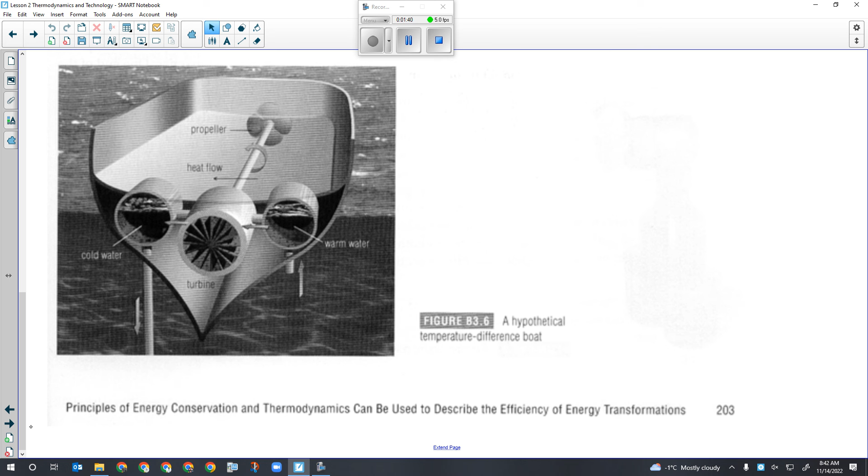Then we got into this whole thing about the second law of thermodynamics, energy going from hot to cold. We talked about the weird design for that boat with the long pipe that went down into the water—the idea being that the warm water at the surface would run through the engine, through the turbine, and down into the cold water through the really long pipe. We said this was completely unrealistic because those waters are already in contact with each other, and there wouldn't be a huge temperature differential.

But the idea is sound, and we talked about using the second law of thermodynamics with this little hot water heater that could heat water in a hot tub. The cold water would come in through this pipe, go into the water heater and be heated up, come out through the pipe at the top and go into the tub, creating a current, or a convection current, where that energy would be exchanged. It would keep going through because of the second law—the second law is going to keep that water flowing through that heater until everything is the same temperature, and then it'll stop.

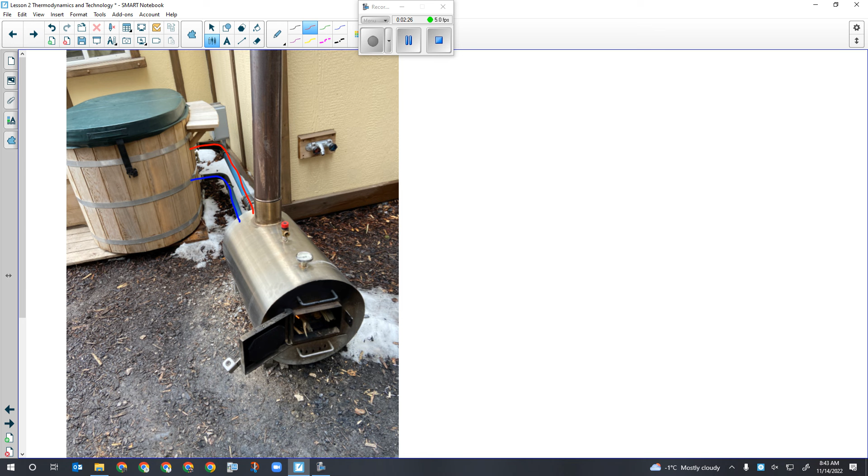If it goes faster, the greater the difference in temperature. So that is the principle behind heat engines. Heat engines use the second law of thermodynamics. If there is a really hot area and a really cold area, energy will want to flow from hot to cold. When it does so, it usually will take matter with it. That movement of matter can then be used to turn a turbine or something else to generate power.

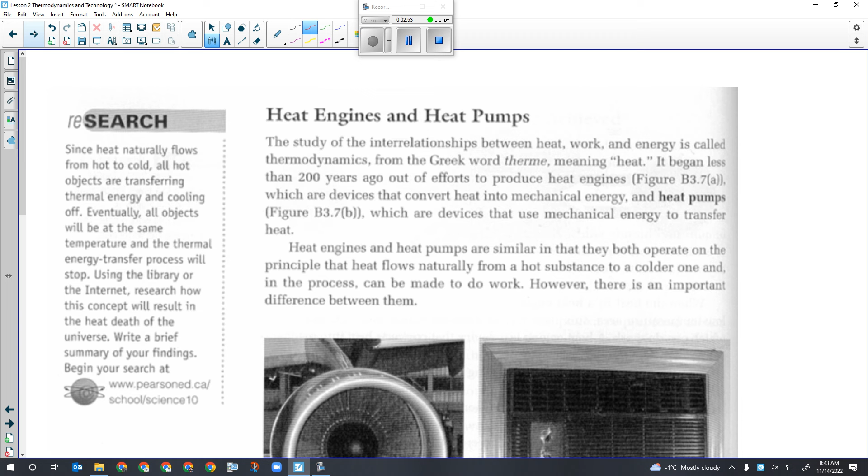That's the principle behind a heat engine, and that is exactly how a jet engine works. In a jet engine, you've got the area of combustion near the front of the engine. Air goes through the engine, transferring that heat out to the back, and that spins the turbine that creates the thrust from the jet engine. The greater that temperature difference, the faster the turbine will spin, and the more thrust will be produced. If there's an afterburner, there's a second, basically hot spot, that is continuing that and creating even more thrust. Does that make sense?

A heat pump works the opposite way. A heat engine uses the second law of thermodynamics; a heat pump goes against the second law of thermodynamics. So if the jet engine is diffusion, the natural flow from high to low, a heat pump is active transport—it uses energy to actually pump hot air or hot water from the hot area to the cold area. Since you're going against the direction it wants to flow, you have to put energy into it.

This is how an air conditioner and a refrigerator work—they're both heat pumps. They take the air from inside your house... I said that backwards, didn't I? From the cold to the hot is the way. With an air conditioner, it takes the air in your house, which is not as hot as the air outside, and runs it through the air conditioner, which contains a compressor and a condenser, and it cools it. Then it pumps the heat using a fan to the outside air, which is already hotter. It uses a lot of energy—your fridge and your air conditioner are the two largest consumers of electricity in your home.

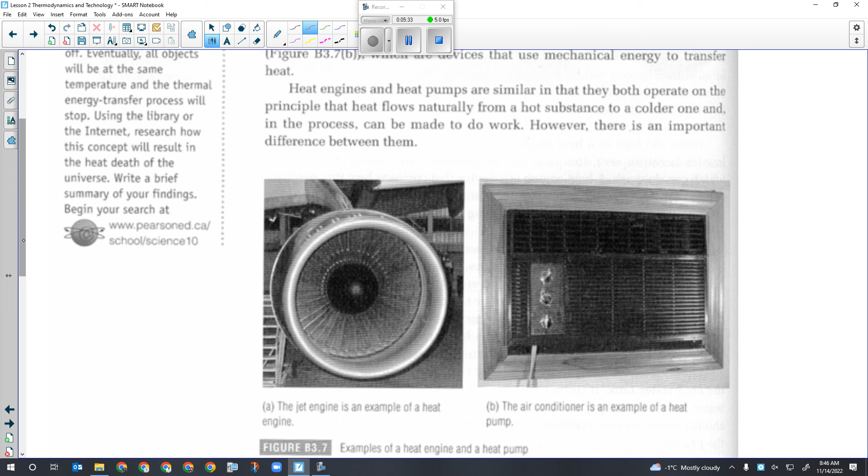So you've got these coils, and they're going to take that coolant down to the compressor. The hot coolant runs from the coils to the compressor. And what do you suppose the compressor does to it?

Kind of like its name would imply. What does a compressor do? Compresses things, exactly. And when you put a gas under pressure, or you compress a gas, you can turn it back into a liquid.

When you do that, it releases all of the energy it absorbed to become a gas. So when that energy is released, because it's changed back into a liquid, it is blown out the bottom of the fridge by the fan.

You may have noticed that there's usually warm air coming out from under the bottom of your fridge when it's running. That warm air, that heat, is coming from the food inside the fridge. It's pumping it out into the hotter area, because obviously it's hotter in your house than it is inside the fridge. So it's taking heat from a colder area and pumping it out into the hotter area. Does that sort of make sense to everybody?

So can you air condition your house with your fridge door open? Why not? You're right, you can't. Why not? Homer Simpson tried it once.

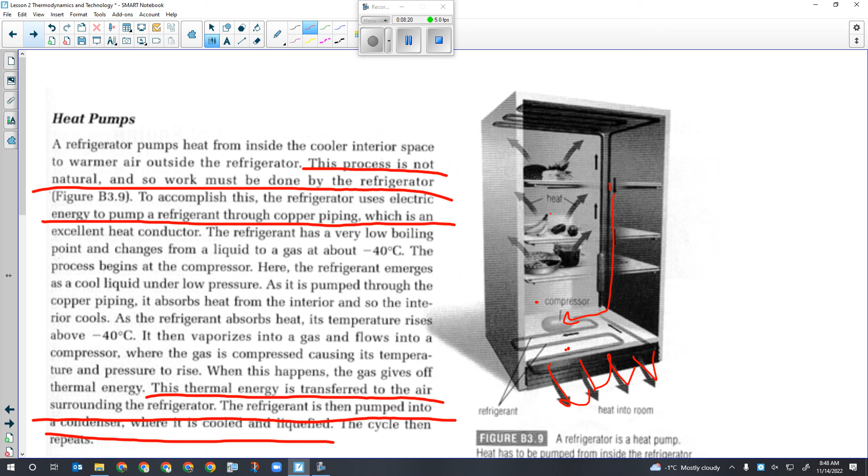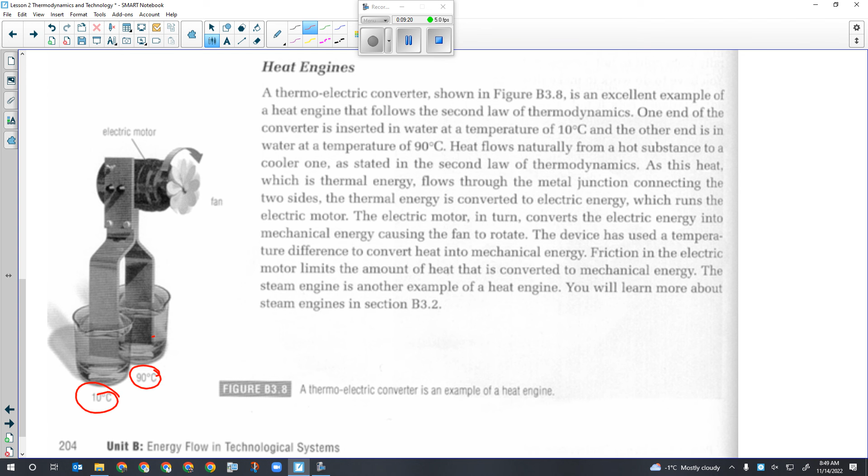What happens to the speed of that fan as they get closer and closer to each other's temperature? It slows down. It slows down, yeah. The greater the difference, the faster the rate of transfer. So if there's not much of a difference, then you don't get that fan spinning very quickly. Thank you, I appreciate that contribution. Does that sort of make sense? Yeah.

So, for a heat pump, remember that the process is not natural. Energy wants to flow from hot to cold, but a heat pump is making it go the other way. That requires energy, so we put a lot of energy into that in order to make it happen.

Thermal energy is then transferred to the air surrounding the refrigerator, the hotter surroundings, and the refrigerant is pumped back to the condenser, or the compressor, cooled and liquefied, and then recycled.

So the compressor is the loud thing you can hear running when your refrigerator is running. It doesn't run all the time unless you've left the fridge door open. But when you close the fridge door, the light goes off—there's no way to check that, but it goes off—and the compressor won't run as much. All right, everybody good with those ideas?

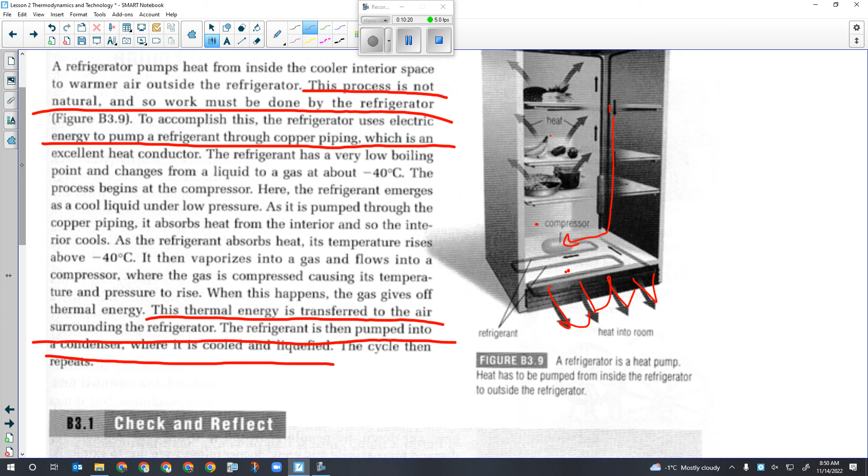Okay, let's have a look at these ones here. So, question number 2.

First law of thermodynamics says that energy cannot be created, it cannot be destroyed, it can be transferred, it can be converted. When work is done to a system, it gains mechanical energy. When work is done by a system, it loses mechanical energy. If heat is transferred to a system, it gains thermal energy. If heat is transferred away from a system, it loses thermal energy. That's the very extended version of the first law of thermodynamics.

What is the distinction between work and heat? First thing, work and heat are both transfers of energy, so they have that in common. It's the type of energy they transfer that is different. Work transfers mechanical energy, where heat transfers thermal energy. That's the distinction between them—the type of energy they transfer is different. Work is mechanical, heat is thermal.

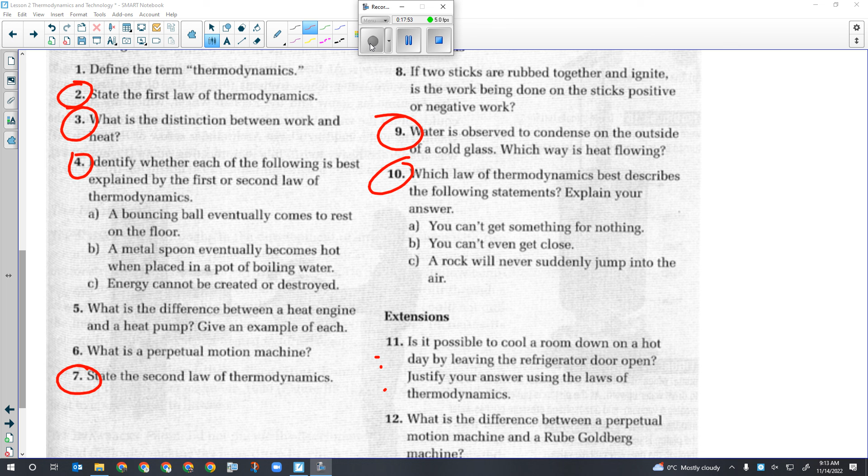Okay, now this, I can't remember if I actually put this in your notes package or not, but it's just something we're going to talk about because it's kind of applications of thermodynamics.

The design of machines, engines, and tools took kind of a weird path. We started building machines and tools before we really understood the science behind them. We needed technology to do a job. That's what technology is, applied science. It's science applied to do a job. But sometimes our technology gets ahead of our understanding.

And the building of engines is kind of a prime example of that. We didn't always understand exactly how the laws of thermodynamics applied to this stuff, but we did it because we could. So some of the earliest machines were things like the Archimedes screw. It was the first pump, great for moving water from low areas to high areas, because obviously water doesn't do that on its own. Water flows downhill according to the second law of thermodynamics.

So the Archimedes screw is basically, well, like any other screw. It's an inclined plane wrapped around an axis. So if I ever tell you that you're an inclined plane wrapped around an axis, it means you are screwed. Just so you know, that's Sheldon Cooper to it, I can't take credit for that. So it's an inclined plane, but it's wrapped around an axis.

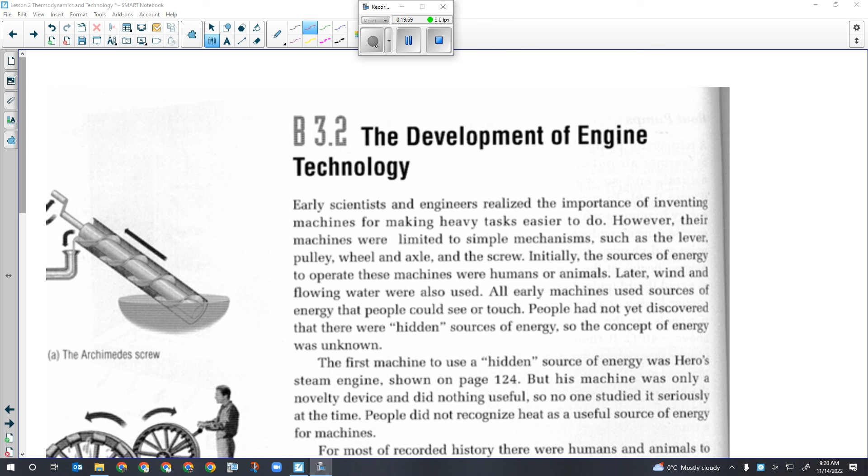There's also things like the Persian wheel, which you could take, you had one wheel that spun the other wheel, and this wheel had buckets on it. So you could raise the water out of there and drop it onto this, and then an aqueduct system would carry it somewhere else.

The Persians were big for building aqueducts and things like that. This was all powered by either people or livestock. We didn't really get into true engines until we started making them use fuel.

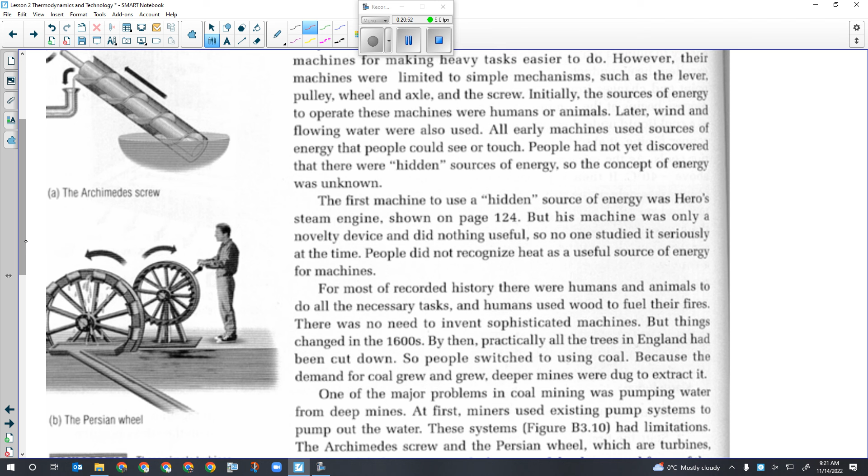The first engine powered by fuel was like Hero's steam engine, which used burned coal to evaporate water, turning it into steam. Steam could flow pressurized through something and turn something else, making it work, like moving a piston up and down. We started building these engines without really understanding how it all worked.

More modern pumps, like instead of the Persian wheel and the Archimedes screw, are reciprocating pumps. The screw and the wheel didn't do much, they just kind of turned. But a reciprocating pump actually pumps in both directions.

So there's a one-way valve system here. As you pull this piston back with the crank, it creates a suction. That suction will bring the top valve down and the bottom valve up, which will draw water into the pump chamber. When the piston starts going this way, the pressure closes this valve, pushes this other valve open, and shoots the water through that valve upwards. So it's actually doing work in both directions.

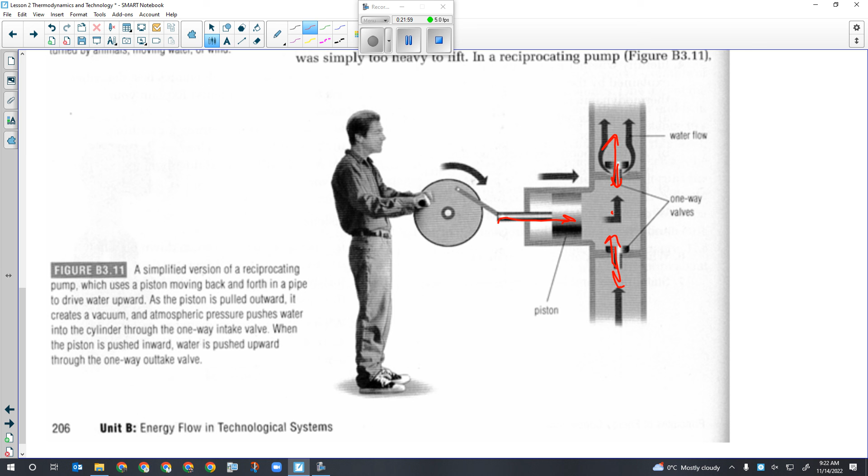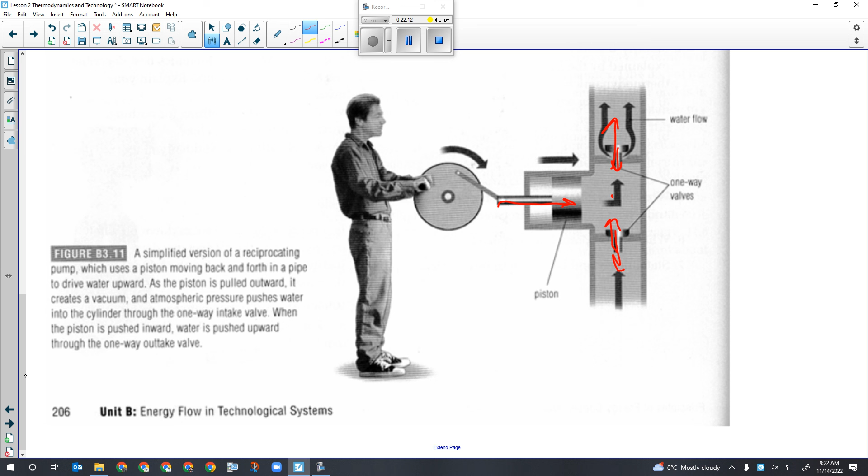Once that was figured out, then we could attach a motor to it to make it do that instead of having a person or a horse actually doing the cranking. Remember before we talked about these hidden sources in some of the fuels we used, that wood could make so much energy, but coal made more, and so on. Well, that's what engine technology kind of came from.

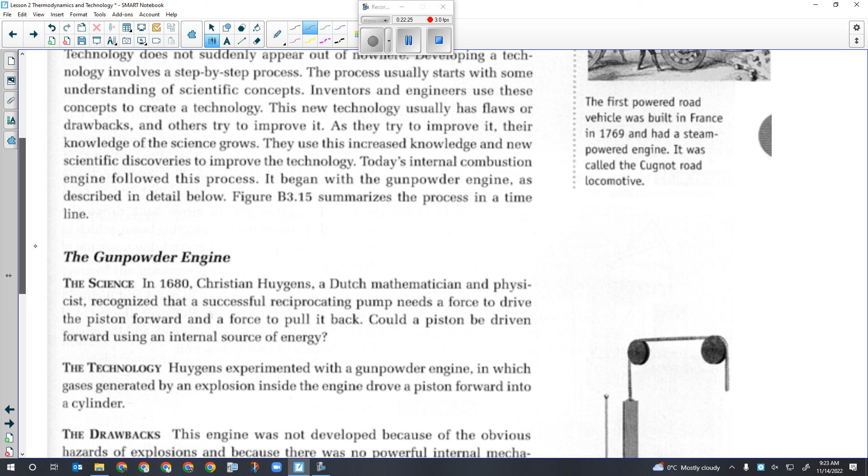The first engine was designed by Christian Huygens. That's also the guy the probe that landed on Titan was named after. He did some stuff with astronomy as well.

He was a Dutch mathematician, and he recognized that this reciprocating pump needed something that could power it, so it wasn't connected to a person or an animal. So he said, I'm going to build an engine that can use the pressure of an expanding gas to do work. He knew that's what steam could do. So he thought there's got to be a way to use expanding gases to push a piston that can be connected to this crank, which is basically how all engines today work.

So he designed the gunpowder engine. Now, as it would sound, it was pretty dangerous. So there was no actual prototype ever built or tested. But the idea is sound.

If you blow up gunpowder, it explodes, and an explosion is rapidly expanding gases. They can do work, also known as destruction. It's that pressure wave of the explosion that does all the damage. So he said, if I can contain that in a small space, then it can do work.

This is how a cannon works, right? If I detonate gunpowder and I have a ball there, the expanding gases push the ball up. Well, if I replace the ball with a piston, the piston can do work. The problem being, you're containing an explosion.

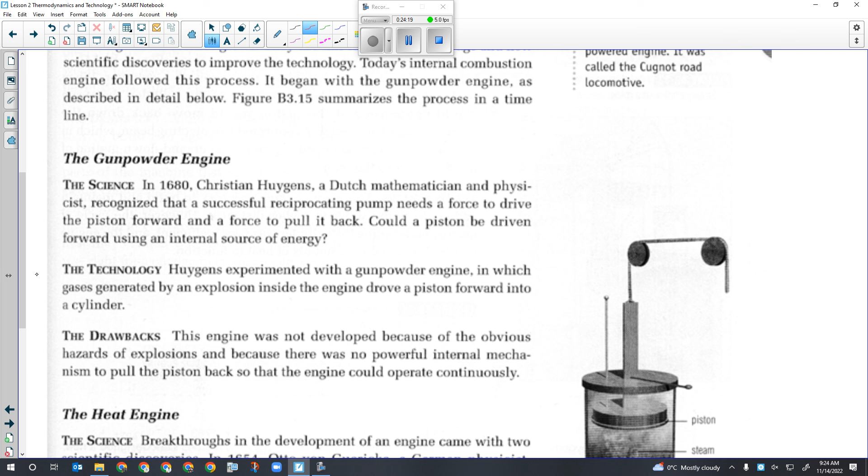What's the problem with containing an explosion? Explosions don't like to be contained. That's the problem with containing an explosion. You really have to control that explosion. Otherwise, it just explodes, and then it's bad. So the gunpowder engine was never actually built, but was sound in its design, at least.

One of the earliest steam engines looked something like this. Now, what we use today are called internal combustion engines because the explosion or combustion happens inside the motor itself, right next to the piston. This is an external combustion engine, where the steam, water and piston are in a separate chamber from the heat source.

This first engine was not efficient at all. They would start the fire, which would boil the water, and the water would turn into steam, and the steam would slowly lift the piston, which could then be attached to a crank or a cable to do useful work. Once you got the piston to the top of the chamber, you had to spray water all over this thing in order to do what?

Once the piston gets to the top, can you get anything else out of this? No, that's as far as the piston can go. You need the piston to come back down. So you spray water all over this, which puts out the fire, cools it down, the steam condenses back into water, and the piston goes back down. Then you light the whole thing back up again, and you get the piston to go back up.

Is this very efficient? Terrible. But it was early, the early designs of engines and things like that. The idea was sound, still worked. You could use steam and expanding gas that didn't blow up in your face to do work.

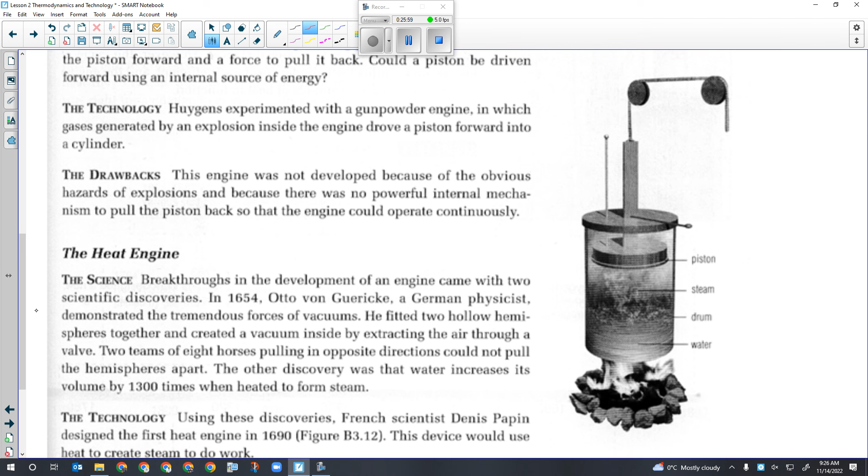So once people realized that, the design of steam engines kind of rapidly improved. There was a very quick development or evolution of the steam engine. But they all were external combustion.

You had essentially a boiler where the water was and the steam was produced, and then you had the heat source, usually a coal-fired furnace underneath it. So you get your steam in here. The steam would do its work, make things go, and then it could be brought back to the boiler after it condensed. So there could be some circulation, things like that. Or fresh water brought in, hot water out, whatever. You get the work done that way.

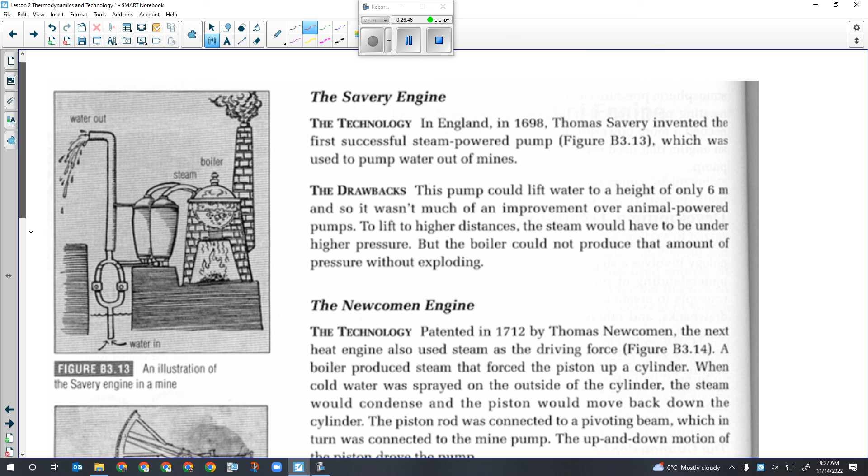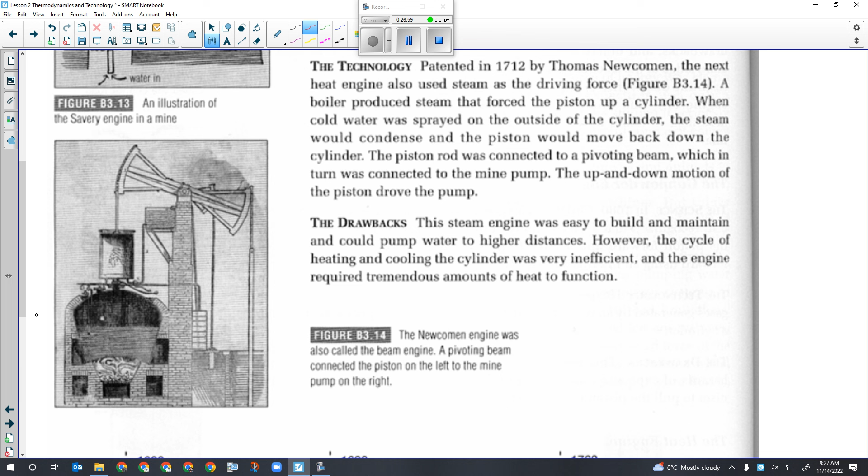With this one here, same idea, but getting more efficient. Instead of having the fire completely open, we had an enclosed furnace, things like that. So they got more and more efficient, used less and less fuel, and were able to reciprocate much more.

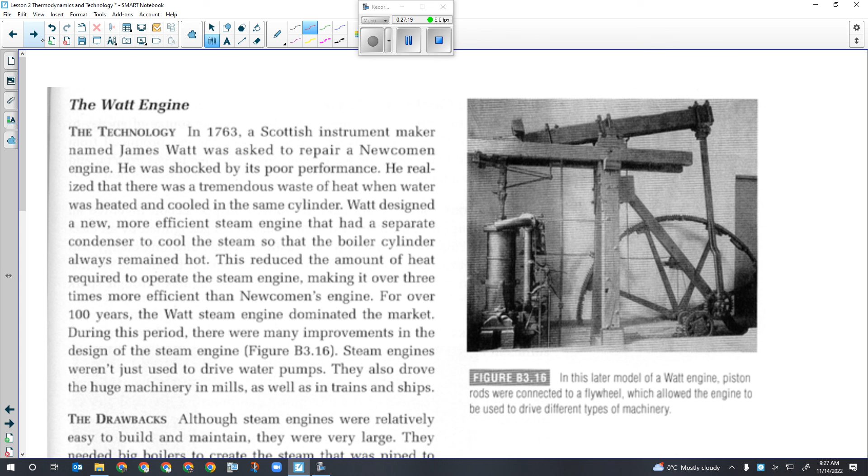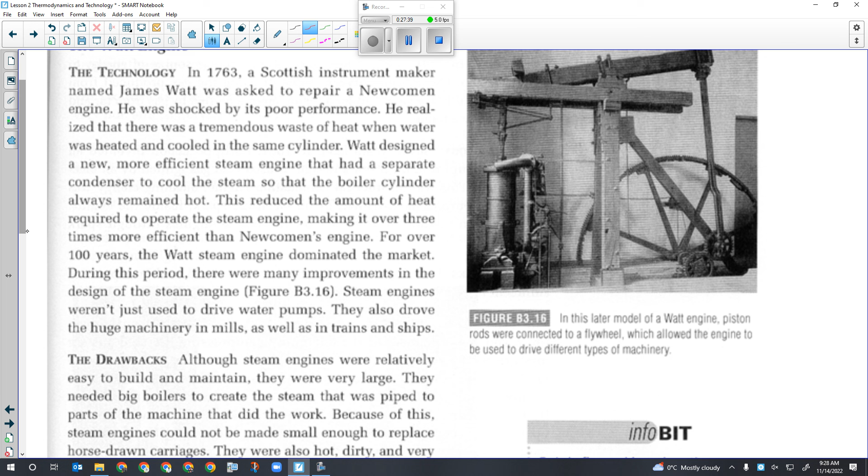Watt is the one who probably developed the best, one of the best steam engines. He was actually asked to repair an older model and couldn't believe how bad it was, how poorly it performed. He realized there was a tremendous waste of heat when the water was heated and cooled in the same cylinder. So Watt designed a new, more efficient steam engine that had a separate condenser to condense the steam, so that the boiler cylinder always remained hot, which makes good sense, right? Why would you cool your main boiler every time you needed to move the piston? So that reduced the amount of heat required to operate it, made it 3 times more efficient, and Watt's steam engine was used for a very, very long time.

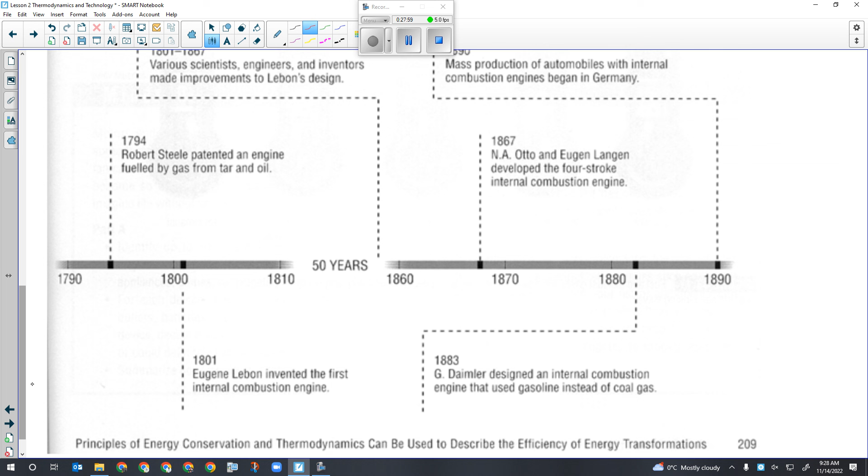So this is kind of what our timeline looked like. In less than around 100 years or so, we go from the earliest designs of engines to basically the internal combustion engine, which came around 1890. The internal combustion engine basically fueled most of the 20th century, and obviously still today.

The idea here was that you had to have a fuel that you could burn inside the cylinder, and you didn't need water then. So this wasn't a steam engine anymore. This was fired by some sort of liquid fuel or a fuel vapor. The first ones weren't terribly efficient. They used coal oil and tar and stuff like that. They would get gummed up really badly. The spark was always going out, and you always had problems with it. They would seize if they weren't properly lubricated. They were just not very efficient.

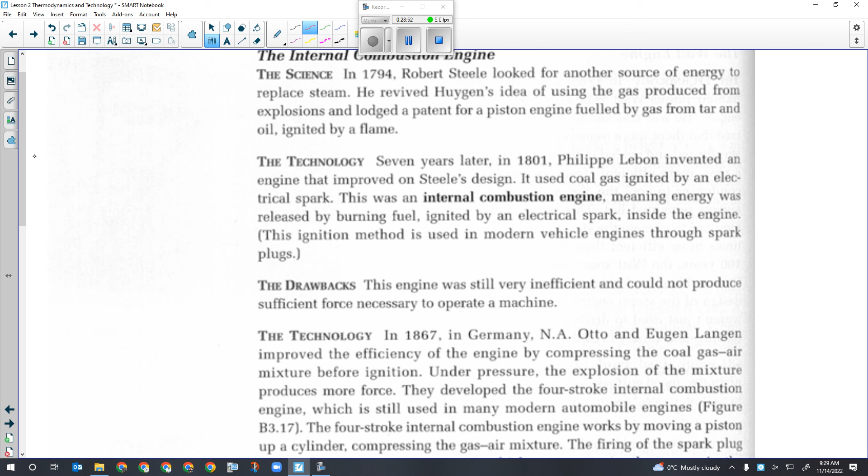But then Otto and Langen designed what is essentially called now the 4-stroke internal combustion engine. There's basically 2 kinds of combustion engines, 2-stroke and 4-stroke. A 2-stroke engine would be what you would have on a weed eater, a chainsaw, like a post hole auger, an ice auger, something small. 2-stroke engines, motorcycles sometimes, like dirt bikes, will sometimes have a 2-stroke engine.

In a 2-stroke engine, you actually mix the fuel and the oil together, so there's not a separate supply of oil. As the fuel goes in, the oil goes in with it, and it lubricates the cylinder as the fuel is burned. They're pretty dirty - that's the drawback to them. They work really well, but they pollute a lot because they're constantly burning the oil.

In a four-stroke engine, you get one power stroke out of 4 strokes. There are 4 strokes in a 4-stroke engine, hence the name. So what happens in your car is that you start out with the intake stroke. In the intake stroke, the piston is moving downwards. What happens is when it goes downwards, your cam, which moves your valves, opens the intake valve and closes the exhaust valve.

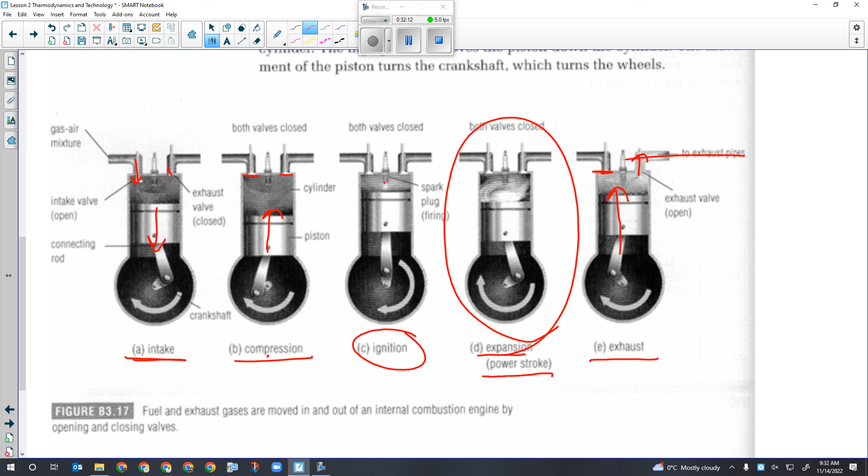Does that sort of make sense? That took a lot of design to come up with that idea. Now that is, of course, greatly simplified - that's just talking about what goes on in one of the cylinders in your car. There's a lot more that goes into that, delivering fuel and mixing it and all of that kind of stuff. But that's generally how an internal combustion engine works, and it makes it much more efficient than like a steam engine or something like that.

When you ignite gas, you obviously get the expanding gases, and that's a little bit of heat, but it's mostly just that the gases produced take up more space. So how much of the energy that's in the fuel do you suppose actually moves the car? Actually does useful work? Because what is there a lot of produced here that's not doing any mechanical work?

Heat, yeah. In a modern sedan, a 4-door car, the engine will run at around 20 to 22% efficiency. And that's it. If you have a hybrid car, that efficiency goes up a bit. If you have an electric car, it's far more efficient, but it doesn't use, obviously, internal combustion. But an internal combustion engine loses the vast majority of the energy in fuel to heat.

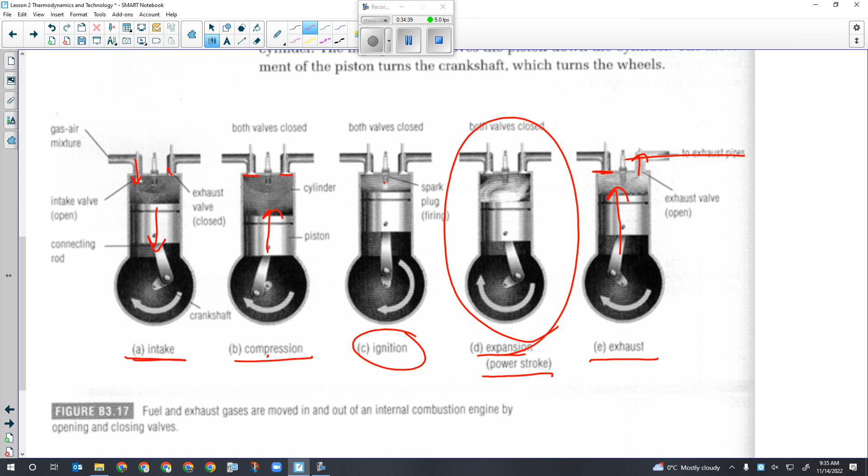The gases coming out of your exhaust pipe are really hot, and that hasn't really done a lot of useful work. In fact, your car uses a bunch of the energy that it gets from the fuel to keep itself from melting down. Your cooling system, the water pump and the radiator, circulate coolant through the car because without them, the car would literally melt down. It produces so much heat that doesn't do anything useful that there actually has to be a system that vents the heat away. So it's not super efficient, but it's obviously way more efficient than a steam engine and doesn't require you to carry a whole bunch of coal and a whole bunch of water around, because that's kind of inefficient too.

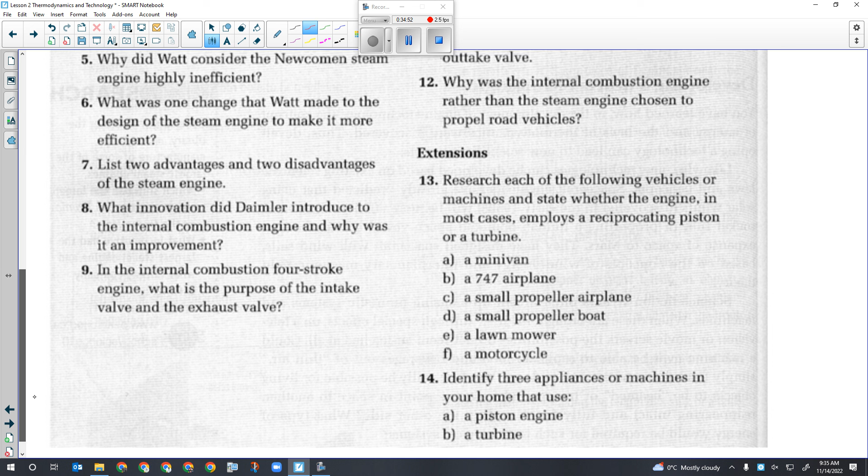That's not something that we're ever gonna have on a test. I just always go over it because people ask kind of how that stuff works, so that's how that stuff works.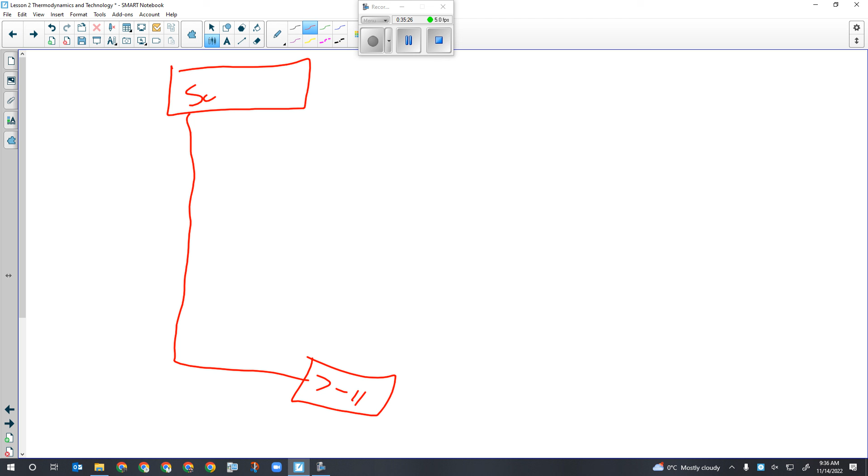Let's say it's lunch and you're gonna walk to 7-Eleven to get something. So we start here at the school. You walk down 32nd Street to 7-Eleven.

How far do you think it is to walk to 7-Eleven? Maybe just under a kilometer. Yeah, I'd say it's probably like 800-900 meters. Let me Google it, let me put it in Google Maps and see how far it is from here to 7-Eleven. We'll say for right now it's like 800 meters, but I'm actually now morbidly curious to find out just how far. Maybe I'll do it.